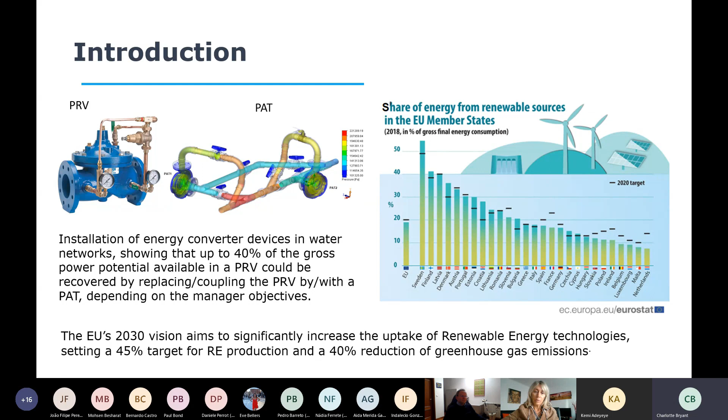In water systems, particularly transmission pipelines, the hydraulic power is significant and relatively constant, turning these pipelines into potential energy sources. The knowledge of power availability is an essential factor to predict and define the economic benefits of converting energy dissipation into energy production.

By reducing water losses, a certain part of this energy in the network can be recovered, reducing greenhouse gas emissions and making the water supply system more efficient and sustainable.

Pressure-reducing valves, PRVs, are a convenient device for reducing leakage by pressure control. However, the energy dissipation that takes place in a PRV is wasteful of energy resources, and this energy could be recovered by substituting or putting in series the PRV with a micro turbine.

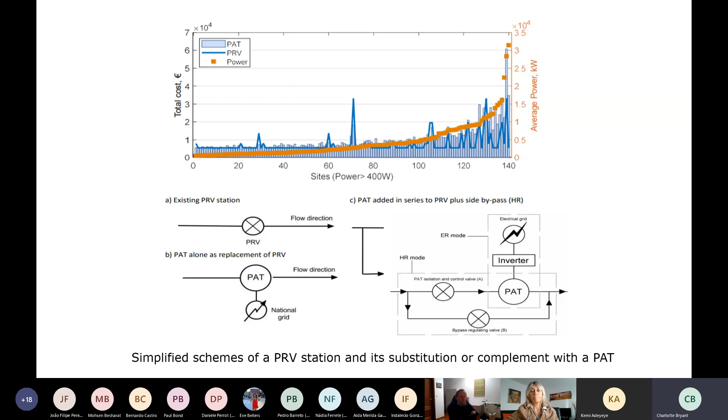Micro-hydropower implementation can lead to more sustainable water service, allowing financial losses to be reduced, and enabling innovative business models to better serve urban and rural populations.

Water abstraction and distribution are among the activities in which energy recovery plays an important role. In the European Union, 8% of total energy consumption in recent years was related to water supply.

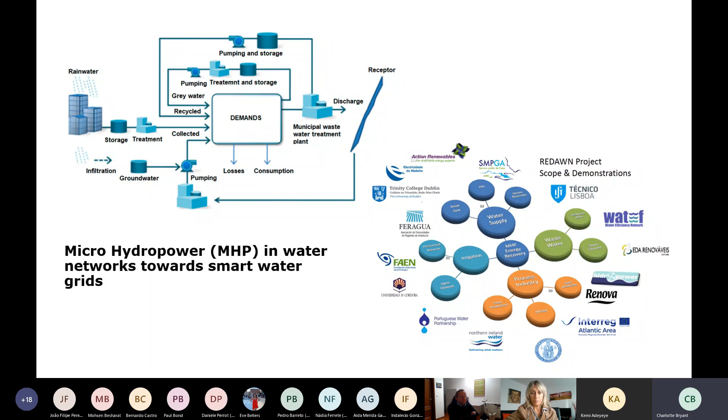Today's seminar will focus on the energy recovery potential and associated impacts. The first talk will present an overview of the energy potential evaluation applied to the water sector, and the second one will present an overview regarding environmental, economic, and social associated impacts.

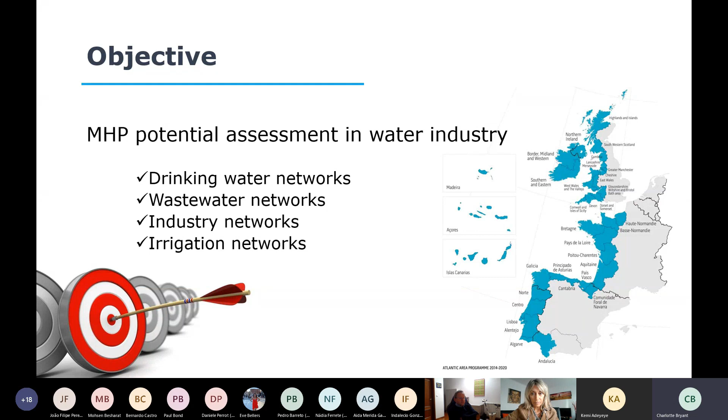The work was organized in four main steps. The first one was data acquisition, which was gathered by the different partners in each region for the four sectors: drinking water, wastewater, irrigation, and private industry. The following step was to estimate the potential for energy recovery based on flow and pressure data at the identified sites for the different countries and sectors.

The energy recovery potential for micro-hydropower was estimated using this equation, considering only those cases in which this potential was higher than 2 kilowatts of power, as plants with lower power are usually not economically viable. The variability in the frequency of the recorded data forced the selection of annual average flow and pressure values as the most appropriate for carrying out this assessment.

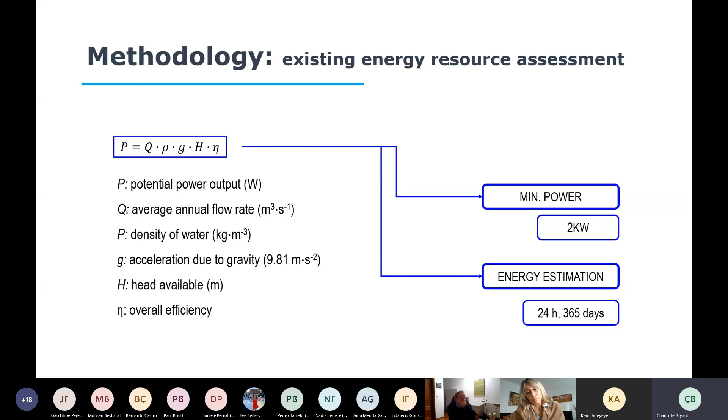Based on these results, the potential for energy recovery was extrapolated at a country level for the entire region analyzed, adapting the methodology to each sector.

Starting with the drinking water sector, the initial information composed a full database for Scotland, Wales, and Northern Ireland, a partial database for Ireland, Spain, and Portugal, and no information for France and England. In the case of France, two sites were studied, but the potential found was minimal power.

From the calculations of the sites collected, a ratio was determined based on the power potential and the corresponding population served by the networks. Due to the differences between the individual ratios—the ratio for Scotland was 4.28, significantly higher than the rest of the countries, compared to, for example, 0.09 for Spain, in kilowatts per 1,000 people—the extrapolation was designed under four possible assumptions.

These assumptions considered individual ratios, an average of all of them, a partial average for all countries but excluding Scotland, and the median. Assumption 1 used individual ratios for countries with a full database and the total average ratio for the rest of the countries. Assumption 2 used individual ratios for all countries, so France and England have no results for this scenario. Assumption 3 considered individual ratios for countries with a full database, while using a partial average for countries with partial or no database. Finally, assumption 4 considered the median of the individual ratios for all the countries.

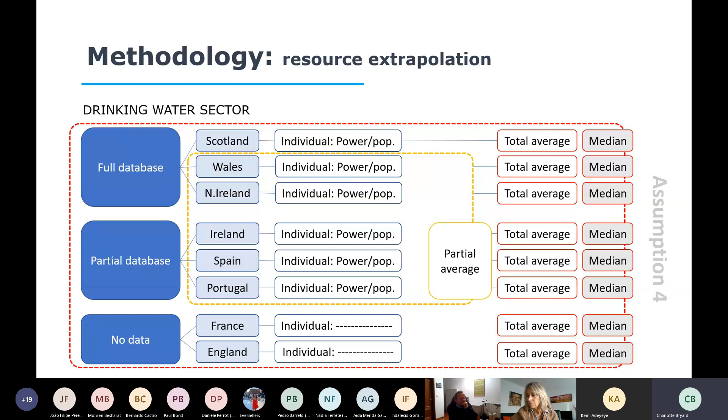Once the four assumptions were defined, the extrapolation for the drinking water sector was made considering the total population of the different countries. In the case of the wastewater sector, the extrapolation for the total population considered the linear correlation found between the micro-hydropower potential and the population served by the analyzed networks in Ireland and Spain.

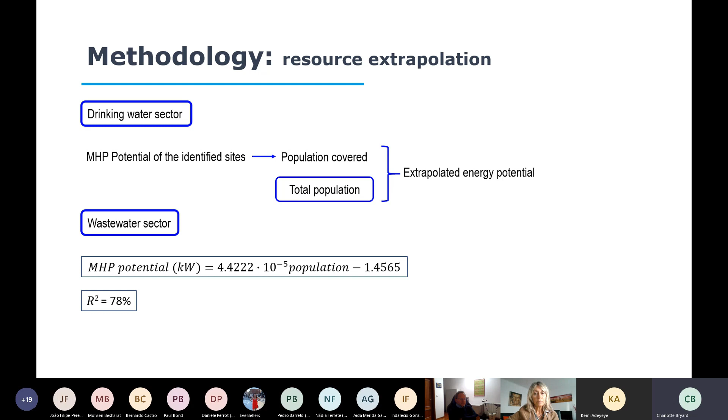In the case of the irrigation sector, the extrapolation was based on the micro-hydropower potential found in the analyzed networks and the corresponding covered surface, as well as the regional information about the irrigated surface for the south of Portugal. In the case of Spain, the extrapolation considered, in addition to the covered surface and the estimated micro-hydropower potential of the analyzed sites, the ratio between the surface and the total water irrigation volumes and the localized irrigation surface for all the country.

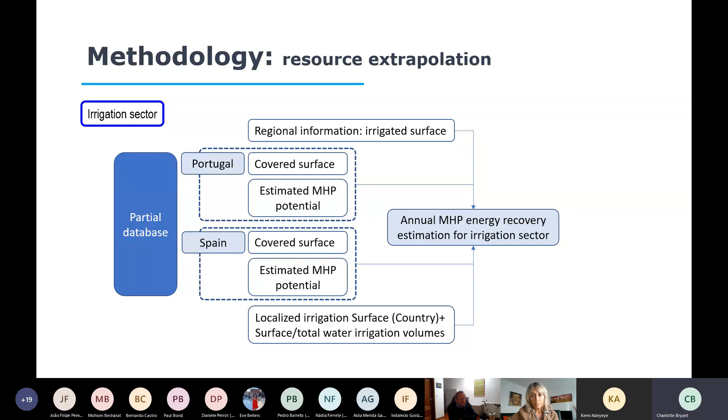And finally, once the extrapolation of the results was finished, an estimation of the future resource projections was made, based on the population growth estimations for 2030 and 2050.

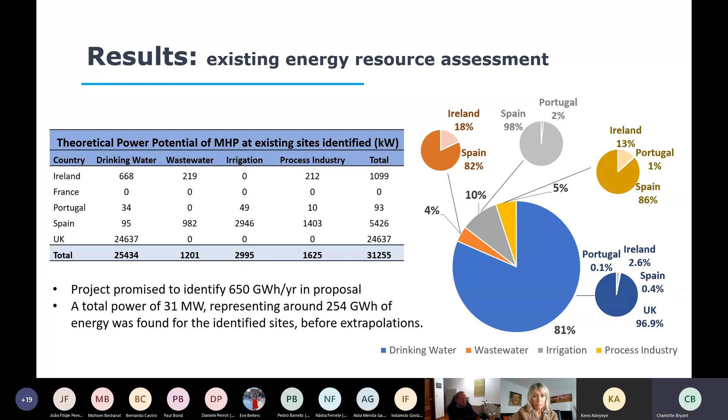In the case of the wastewater sector, the total energy extrapolated amounted to 75 gigawatt-hours, with France, England, and Spain as the countries with the highest contribution.

And finally, the results for the industry sector show a total micro-hydropower energy potential of 47 gigawatt-hours.

Good afternoon, everybody. During my presentation, I would like to present the benefits associated with the installation of micro-hydraulic power plants in water networks. These benefits are not only economic, but also environmental or related to improvement in the management of the networks. This is what we have tried to assess in the REDAWN project.

The main benefit would take place if we were able to take advantage of the energy potential identified in the water networks of the Atlantic area.

I will start my presentation with an introduction of my organization, the Fundación Asturiana de Energía, and then try to explain some general features about the studies we have carried out in the framework of the REDAWN project, and then present the main results of each study.

I will start with the environmental impact assessment study. Then I will present the economic and feasibility assessment study. And finally, I will present the results of the sector-level economic impact analysis. Finally, I will give some general conclusions about the work we have carried out with the elaboration of these studies.

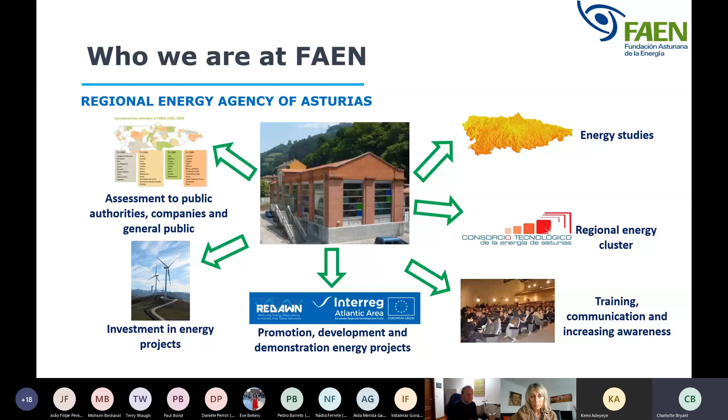Finally, we also participate in renewable energy promotion projects of interest for the region. In this way, we are investors in wind farms, mini hydraulic or micro hydraulic plants, photovoltaic plants, or even a pellet factory.

As part of these activities, we joined the consortium carrying out the REDAWN project. Our main activities within the project are the installation and operation of a pilot plant in Spain, located in Palmería in Córdoba, and the assessment of the benefits of this installation.

This analysis has been carried out with the collaboration of IST, the Superior Technical Institute of Lisbon, and Trinity College Dublin. This assessment has been summarized into 3 studies: one about the environmental impact assessment, another about the economic feasibility study, and a third about the sector scale economic impact analysis.

These studies have two clear objectives: first, present the REDAWN project results; and second, provide potential developers with information for their decision-making activities.

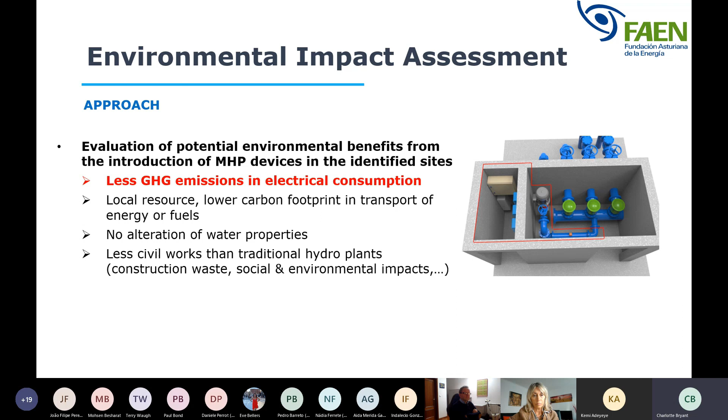Second, another positive environmental effect to consider is the reduction of the risk of soil saturation from pipe leakage, because this technology works as a pressure reducing element.

To quantify these benefits in some way, we have estimated the potential reduction in CO2 emissions using the consumption of electricity. Considering the average emissions of each country in the generation of electricity, it's possible, with the energy consumption, to estimate the carbon footprint of water networks in the Atlantic area.

Considering the energy reduction potential calculated in the study presented before, it has been possible to estimate the CO2 emission savings achieved through the use of these facilities.

On the other side, the irrigation sector has the lowest emission rates, with only 7% of the total emissions.

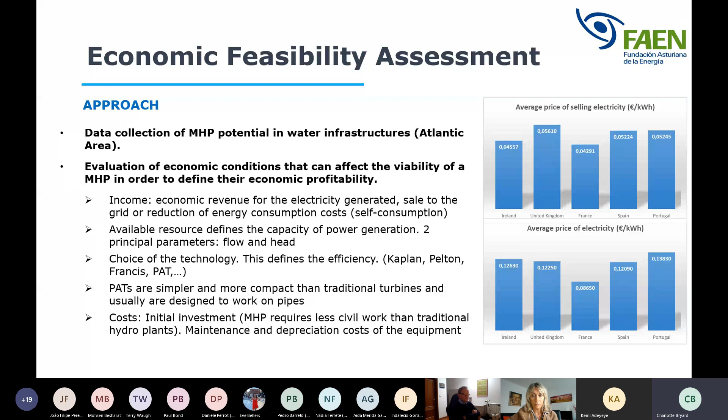The second part of the document explains the economic benefits resulting from the integration of micro-hydroelectric plants into the water networks. The most important identified are, first, the reduction of energy costs. Following the self-consumption strategy, it's possible to reduce our energy consumption and, in this way, our energy costs. Second, the reduction of investment costs in pressure reducing valves or similar equipment, because these micro-hydroelectric plants indirectly work as water pressure reducing elements. And finally, the possibility of reduction of operating costs.

The electrification of water networks in isolated areas, combined with the use of sensors and monitoring remote control devices, allows us to improve tasks such as leak detection, pressure regulation, or reading water quality parameters. This would have an impact on greater efficiency in water and energy consumption, and in this way, an optimization of operating cost.

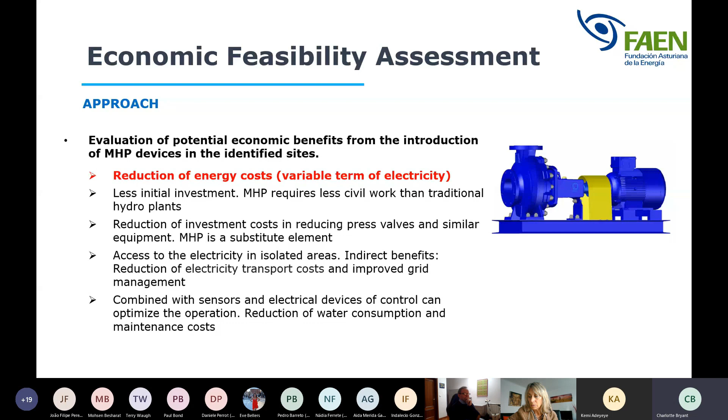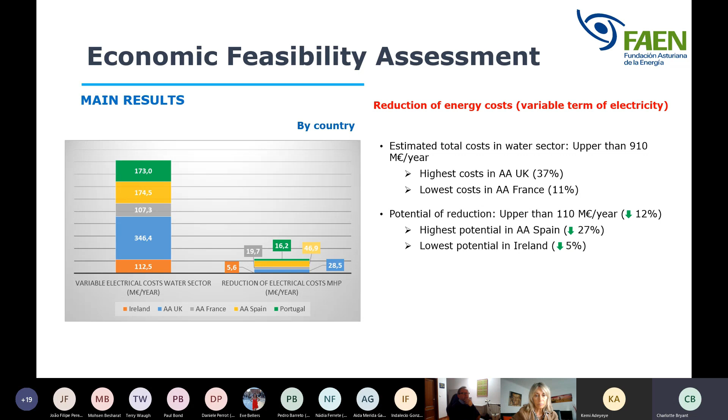Finally, regarding the study of the effect on the water sector, a first assessment of the situation of each sector has been carried out per country. Several representative indicators were considered to evaluate the situation in each sector: for water treatment, the water productivity; for irrigation, the volume of water; for water purification, the volume of wastewater generated; and for industrial water, the volume of water consumed by the industries.

Once this first assessment was carried out, the benefits provided by the micro-hydraulic installation in the sector were presented in a qualitative manner. These benefits can be summarized in three: first, the environmental and economic benefits already explained in the previous slides; second, the electrification of hydraulic networks that allows the modernization of the equipment, the use of sensors, and with it, the improvement in the management of them.

With electrification, you can do better control of potential leaks, as well as install devices to improve water quality in locations where now there is no agreed supply. Finally, consideration should also be given to the positive image for the sector, which can show technological renewal aligned with European strategies, like, for example, the Green Deal.